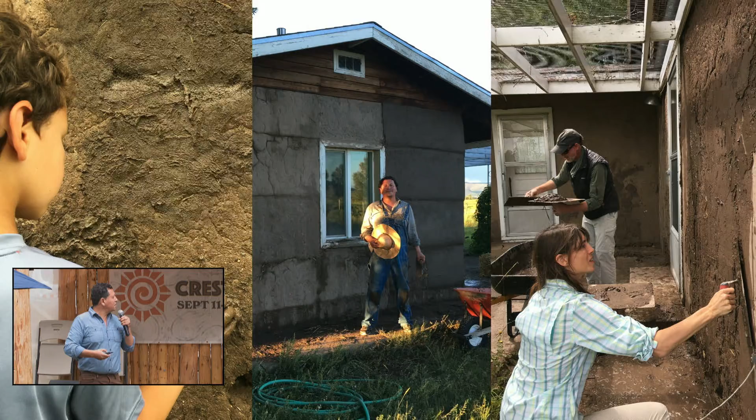My own great-grandmother's sister's family's house, which I use as a test site for teaching traditional and indigenous building technologies, how to earth and plaster in traditional ways, how to make adobes, how to make hornos. I tap into traditional cooking traditions as well that were practiced by my family. But there is an ethos around thinking about what is in the landscape and how can we build with that material.

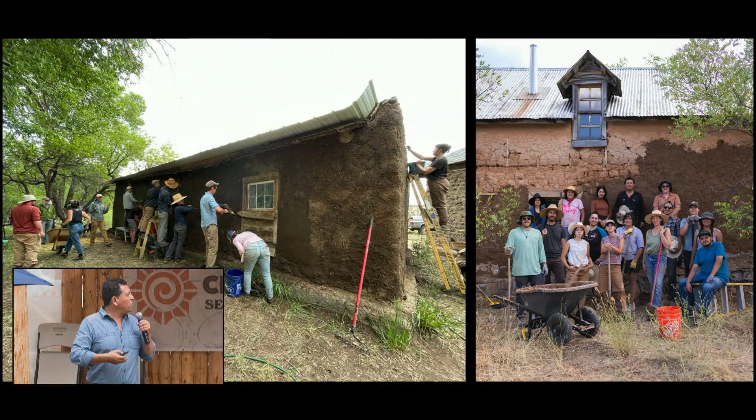So I host workshops often that connect people of earth and heritage practices back to these practices that have been disconnected from their traditions because of capitalism, because their lifestyles are changing, because of assimilation. And so earthen architecture practices aren't continued anymore because of changes in code regulations and building regulations. So I teach these classes on how we can reconnect ourselves through the maintenance and restoration of these buildings.

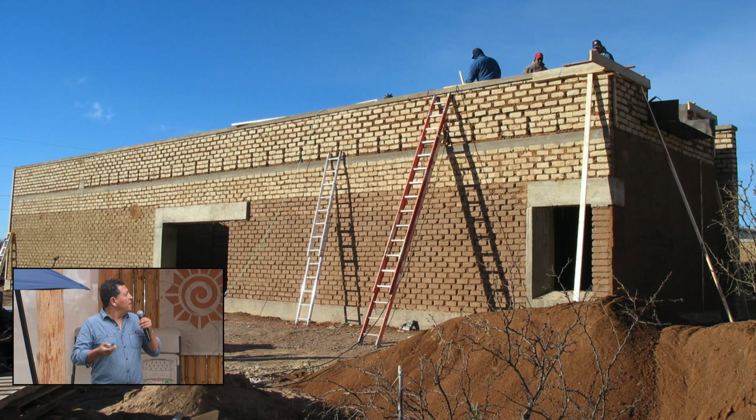Also, as an architect, I design buildings made of adobe, contemporary buildings. This is probably the first adobe building built in Marfa, Texas in 100 years, called the Box House, entirely made of adobe, plastered with adobe on the inside and on the outside. The bricks on the bottom come from New Mexico. The bricks on the top come from Ojinaga, Mexico. So there's a future archaeological project or anthropological project or geological project built into this house that connects this house to borderland landscapes.

I also think about how there's a politic embedded in building with earth. Not only the politics of working with codes, but also the politics of being activists that want to hold true to these traditions of building, and how adobe buildings can be a political project.

This was a project I collaborated on with two artists from Europe called Prada Marfa. It's not an actual Prada store. It's a sculpture. It's an installation built in the Chihuahuan Desert in the middle of nowhere, but it holds the 2004 line of Prada shoes and purses. So there's a paradox in this building.

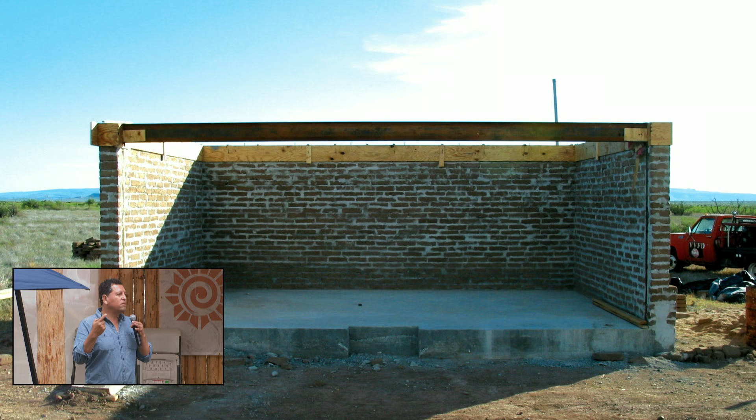There's a paradox about this building being in the borderlands, about a site where people walk hundreds of miles to come to the United States, a site where these shoes that cost in excess of $1,000 are on display, and it talks about the borders between wealth and poverty in the United States, particularly in the borderlands of Texas and Mexico, and the contemporary borderlands. A building we made out of adobe to demonstrate again that juxtaposition between wealth and poverty, between contemporaneity and history and tradition.

We set each adobe brick in a cementitious mortar, not because that's a better way to build, but because that's what the US military used to build forts after the Mexican-American War along the Texas-Mexico border. And you can see those buildings in Marfa, Texas, and how time has taken a toll, in fact eroding the adobe faster because it's set in an impermeable layer of cement.

In fact, this wall just collapsed recently, I was told, after being there for maybe, I don't know how many decades or close to 100 years. But these are expressive ideas about how we can communicate politics, tradition, culture within a very single, humble material.

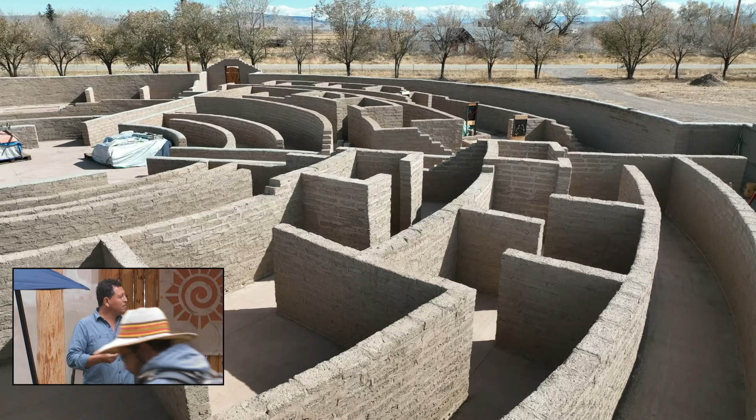If you've been to the town of Conejos in Conejos County, I've been working with the community there for 19 years to design and construct this labyrinth as a site of internal reflection, of prayer, of spiritual contemplation. And it finally was completed this year after 20 years. The community made over 40,000 adobes to build this structure. We taught the community how to make adobes, for those who didn't know, how to stack them, how to lay them. And after 20 years of slow process, this came together.

Obviously, I have an obsession with earth and architecture. I try to share this with the world. I have a website called eartharchitecture.org. You can go to that website, and it's kind of a repository of earth buildings from all over the world.

Because earthen construction is actually what connects us across the planet. People build in New Mexico in the same way they build in Mali, Africa, in the same way they build in Yemen, in the Middle East. On every single continent, you can find similar construction processes and methodologies.

In 2008, I also wrote a book called Earth Architecture, which talked about earth being a modern building material, a building material that can connect us to, at that time, our 21st century lifestyles. And at the very end of the book, I wanted to talk about what the potential future of earthen construction was. I talked about how the internet was connecting us and shaping the way we can inform each other about earthen construction practices. But there was a novel technology that was emerging called 3D printing.

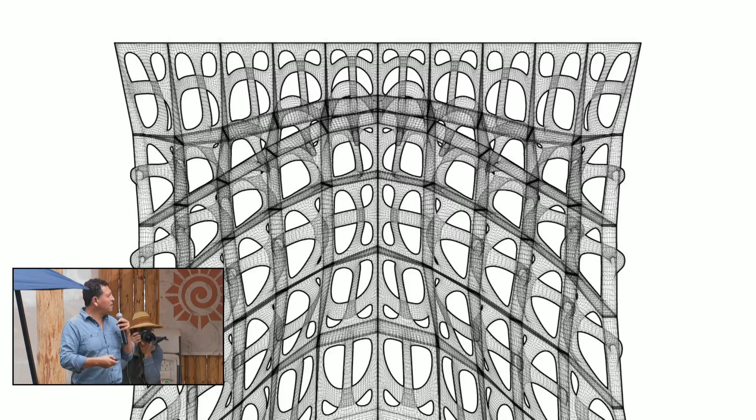This began in 2009. It's been a slow process, but I'm trying to figure out how we can take humankind's oldest additive manufacturing technology, which is earth, and create structures using computational design, digital design. And we had lots of successes in using clay and being able to use additive manufacturing to make objects like this. They were very fine and detailed, and because they were so fragile, we began to fire them and make ceramic objects.

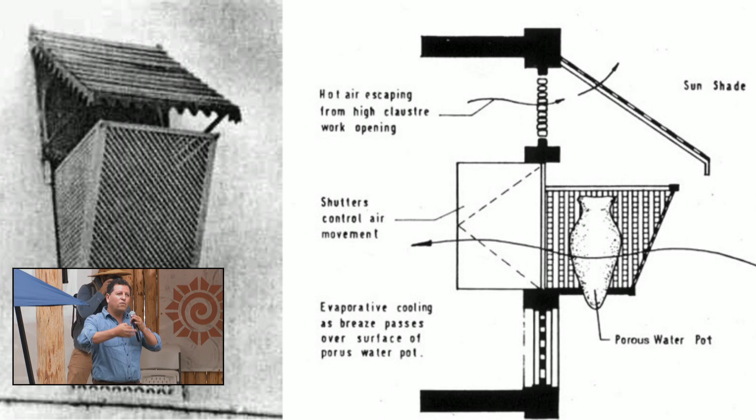And I wondered, well, if a robot can make ceramics, what do we do? Do we make bricks? Do the bricks hold plants? Do we make bricks that have air pockets that can hold insulation? Can we build upon traditional ancestral intelligence to think about how we can transform simple things like some of the earliest swamp coolers, which were made out of very porous ceramics, that were often placed in a window where cool breezes came over that humidified the air, lowered the temperature in a building? And could we make bricks that could do the same thing, that could hold water, that can pass air through, humidify the air?

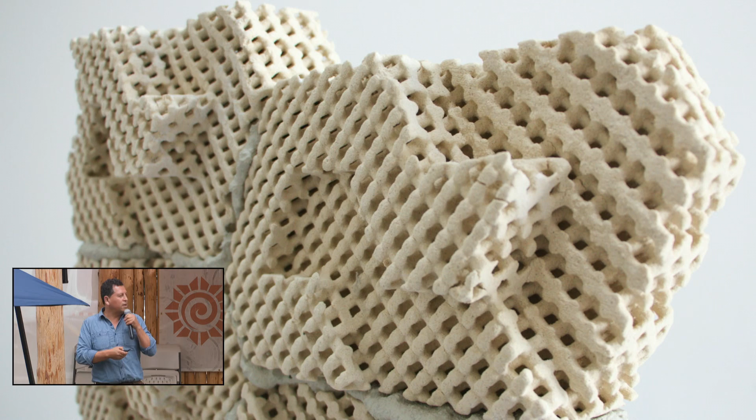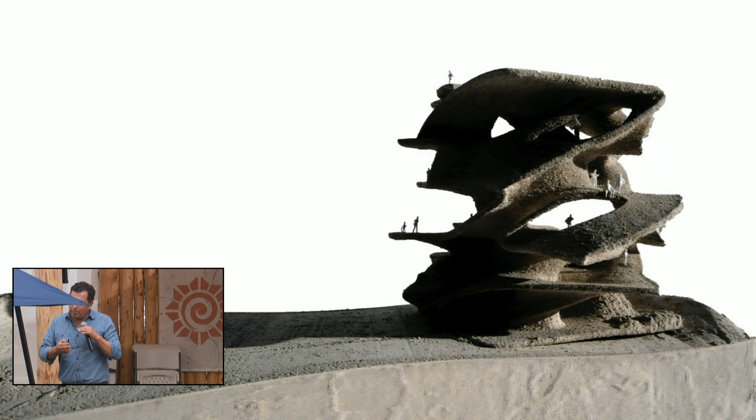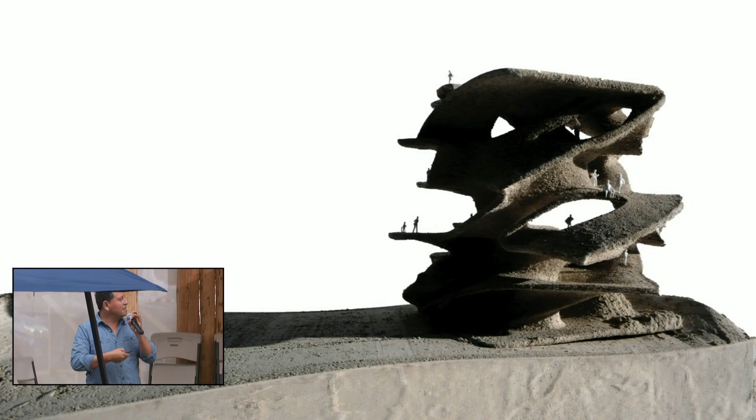So started to use clay, started to experiment with sand, began to think about how we could make objects made out of sand. And this is at a time when 3D printing was in its infancy, and it was very expensive to print a very small object with a 3D printer. A small object as big as this microphone might have cost $80 to make at that time. But because we developed this material using sand, it became very inexpensive. And I began to imagine, well, what could buildings look like if they were made out of this material?

But also, I was making models. Then I realized, oh, I can make assemblies. I can make assemblies of parts that could begin to make walls. And so these are some of the earliest studies made out of sand, thinking about how we can create an aggregation of objects based on the dimensions of the 3D printer that we had, and make much larger objects that attenuated sound, that responded to structures, and also always looked back to the ancestral intelligence that were embedded in our knowledge base of construction.

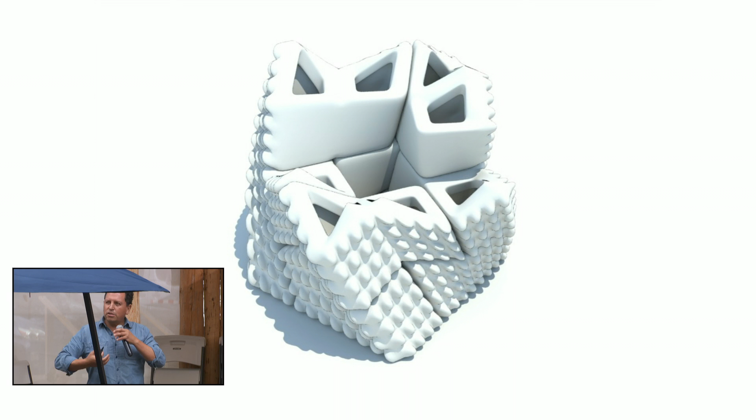And so if you're familiar with Incan ashlar masonry, you find this in Cusco in Peru, these interlocking stone blocks that are very difficult to achieve. It demands incredible craftsmanship to make blocks like this. This one, I think, has 12 corners of interlocking these blocks very tightly. But we could maybe 3D print earthen blocks. Those blocks in Cusco actually respond to earthquakes. They're very seismically resistant to earthquake forces. Could you create blocks that do the same thing with a 3D printer, that allow them to be interlocked, that have instructions embedded in them, that have handles on them, so you could quickly build a structure that's seismically resistant using the building material right beneath our feet?

This journey of thinking about local materials and this ethos about adobe allowed my studio to expand the possibilities for what else might be considered a local material. And we began by just looking around the kitchen, the things we throw away, like coffee grounds. And we began to invent a material for 3D printing that used coffee. If you're familiar with 3D printing, there's a lot of plastic 3D printing materials available that put a little bit of coffee or a little bit of wood or a little bit of some material so it kind of looks like this.

We made a teapot that was based on the first pot ever. The first object that was ever translated from a physical object to a digital object was this teapot called the Newell teapot, or the Utah teapot, because it was developed at the University of Utah.

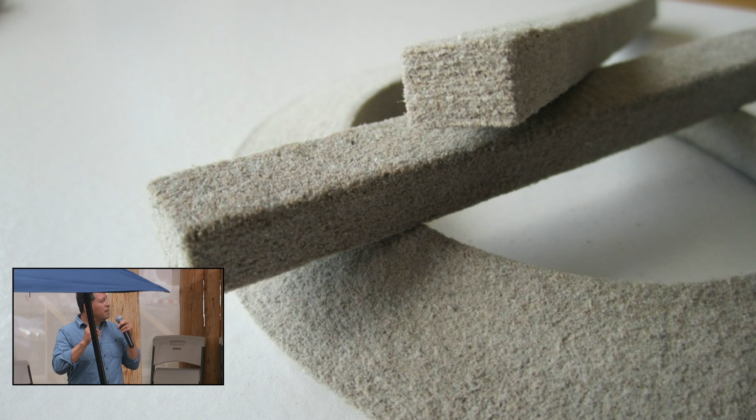But we experimented to see if we could make a material for 3D printing out of this waste product. And so these are Chardonnay grape skin objects and cups that we made out of that. Not only other biological-based materials, paper made from paper pulp and paper waste, newspaper waste in this case. These experiments made of paper pulp evolved

to the point where we could begin to print with sawdust. And in the US, we produce like 7 million tons of sawdust a year from the construction industry, and it usually goes into landfill. So this became a very productive way to think about how we could use this sawdust, not in a subtractive way.

And what I mean by subtractive is that we have a forest, we cut down trees, we take those trees, we subtract them, we make boards that are used for construction when we chop them up. And ultimately, we're left with a lot of sawdust. Could we use this additively to imagine the way we can make new products in the future?

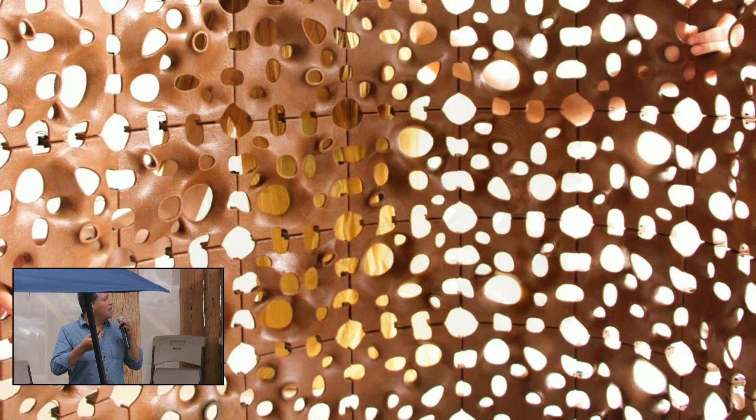And so we developed a 3D printing material made out of sawdust, always imagining how we could maybe make building facades, components in automobiles, screens, any kind of object just made out of 3D printed wood. And it became very, very successful. We actually started this company and sold this company. We called it Forust. We believe that the forests are for us, so we should save them.

And unfortunately, when you sell a technology, you think that all of a sudden that technology is going to take over. And I was very excited and said, now I can print anything. I'll print a house. That was our first project after we sold this company. And instead, this company decided to shut it down. Just like they bought it, and they don't want to do anything with it.

Sometimes companies do that. They don't want something to go to market, or they don't want to go to market yet. So that was a lesson in thinking about what it means to develop intellectual property and attempt to bring it into market, and the kind of trust you might have in companies in order to think about the future of construction. Other materials, salt.

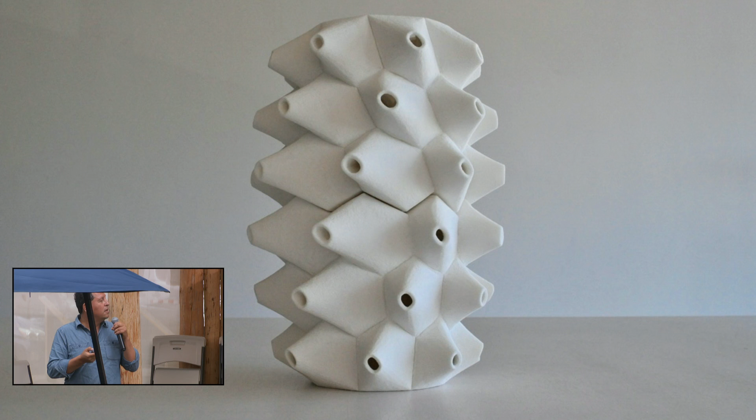In Northern California, if you ever fly into San Francisco Bay Area, you see these beautiful colored ponds. They're actually microorganisms that are responding to the brackish water, where they fill up these pools, and over the course of a year they dry and they produce hundreds of thousands of tons of salt. So it's a material produced by wind and sun, and we developed a 3D printed material made of almost pure salt.

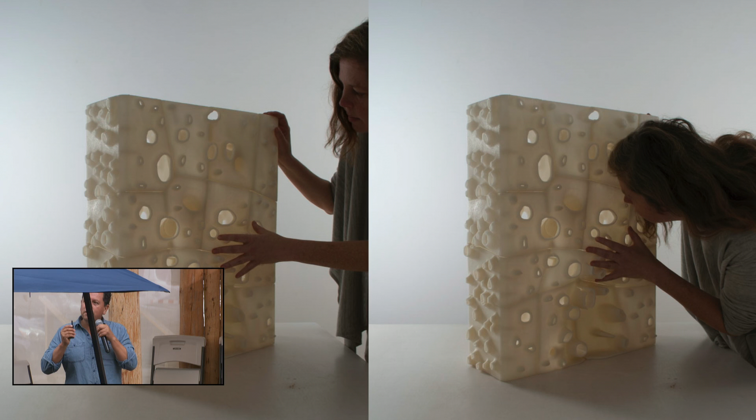And all these materials, when they come out of the machine, they're actually edible, except for the wood. Yeah, I guess you could eat the wood if you wanted to, but they're totally non-toxic. In some cases, we would coat them with a sealant made out of bamboo that was developed at the University of California. So it's like a low VOC polymer. Every single wood product in your home is coated with a polymer, but they produce a lot of gases. This one, in fact, came from a recycled bamboo product.

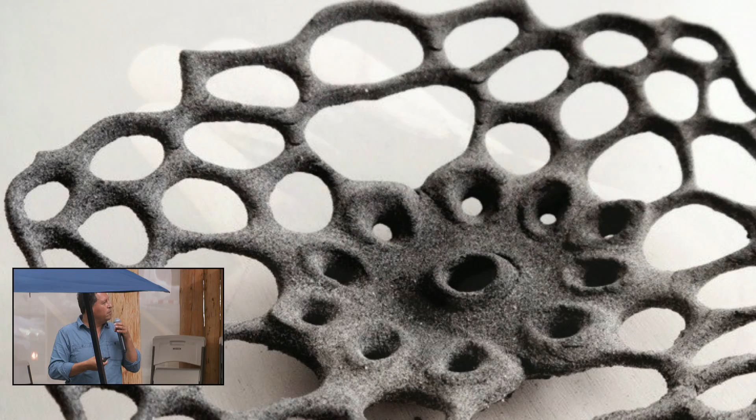But because some people ask me, are these waterproof? In many of these cases, they actually are, and these epoxies actually strengthen them. So this is an experiment of salt. So we're beginning to think about how we can scale up other materials, car tires, cryogenically frozen car tires that are pulverized, developed into a 3D printable material. And these are some of our experiments that came out of our studio.

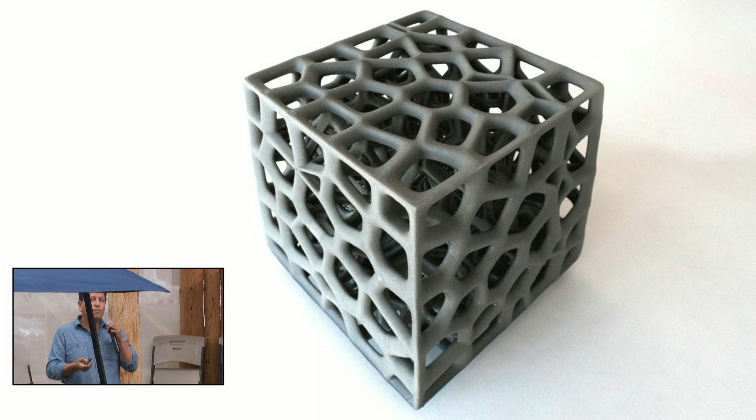And of course, cement. And that's where the 3D printing industry has gone. But we developed a way to produce objects with cement that used very, very little water and no formwork whatsoever. It can make very complex objects, very thin objects. The cement was even translucent if we could print it that thin, about 1/16 of an inch thin, and extremely lightweight.

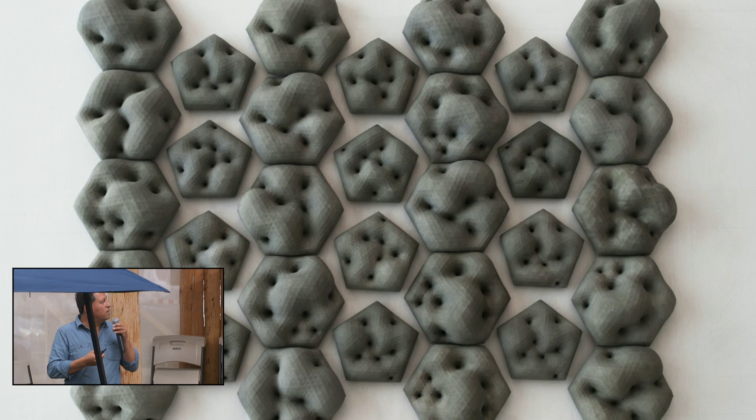And so lightweight that they become, you couldn't pick up a concrete ball this large, but these were very lightweight objects that could be assembled very quickly. And so these aggregations allowed us to assemble furniture, partitions, spaces, objects.

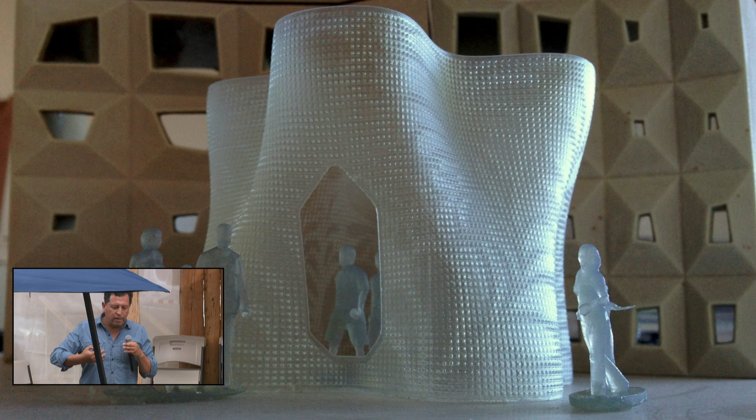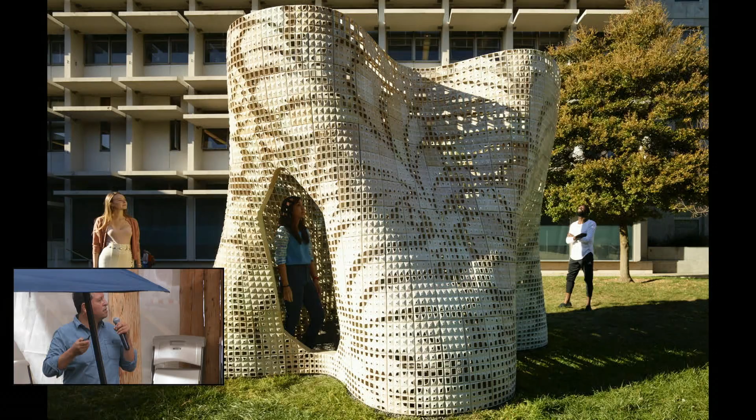And one of the beautiful things about this way of working is that if you are a designer or an architect, you typically create a set of instructions for someone to craft or build the thing that you want to build, whether it's a building or a piece of furniture. But the beauty of this is that you can design this in the computer and go straight to manufacturing, straight to construction. So the very same information used to create this model was the very same information used to create this space, this object. And extremely complex.

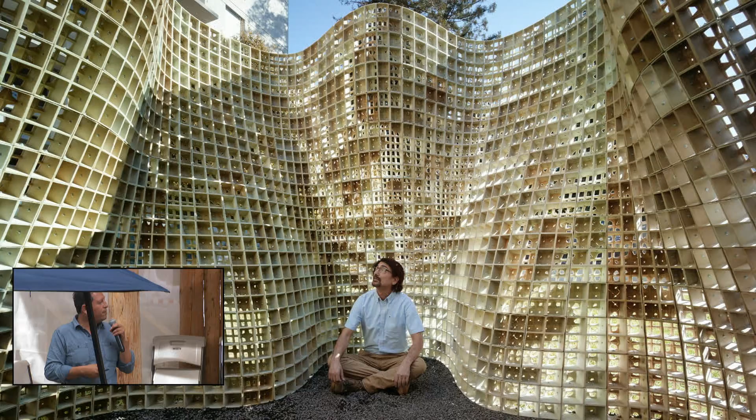Every single one of these is an experiment in a way of working and exploring the possibilities of additive manufacturing. In this particular instance, these experiments very much had to do with the notion that you could disassemble and assemble an object quite quickly, and just a few people could assemble this room in just a matter of 15 minutes or so.

So it was an incredible diversion that lasted many years, that we began with earth and ended up with salt, wood, rubber, car tires, all these things. But the idea was that we would always return to a way of thinking about how we could scale up the possibility of printing with earth. One of the requisites of this was to have a higher degree of control of the movement of a robot to deposit earth in a particular way.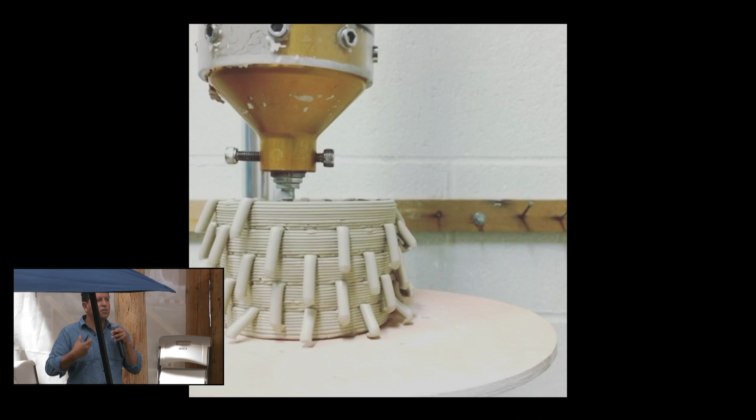And about 8 years ago, we started on a project that began to 3D print with ceramic clay, and we started to create these very weird objects. And this was a very different journey that we embarked upon, because we are not ceramic artists, but we had invented a way of placing clay down that didn't follow the rules of 3D printing. The rules of 3D printing is that you're making an object in the computer, and the idea of that with a robot was to make the exact object that was in the computer.

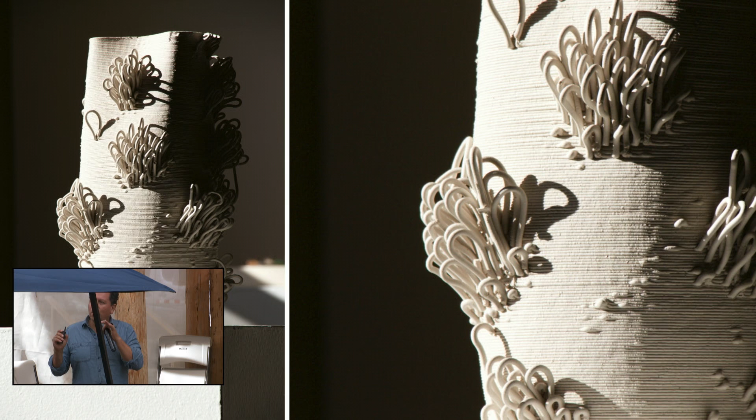But instead, we found that the glitches were the most exciting part, that you could deviate from the making of the object to make objects that had incredible textures, new kinds of possibilities that responded to the gravity and plasticity of the material. The same way that you would do with your hands when you're building a building made of adobe. You might experiment, you might push, you might leave your handprints in it. In a way, this is leaving a digital handprint based on errors that we calculate into the making of these objects. Not knowing what these are good for, just that they're really beautiful and interesting in a very scientific way or in a very artful way.

And we explored ways of making ceramic objects with incredible textures, different kinds of forms or shapes. And you might think these are all vases, but they're not vases. What these are all are studies in the movement of a robot depositing clay. They're mathematical formulas that become material. And we began to think about, okay, well, how can these become building materials, and what are they good for? Could they become facades? Could they become new kinds of cladding systems, micro shading devices, shingle devices?

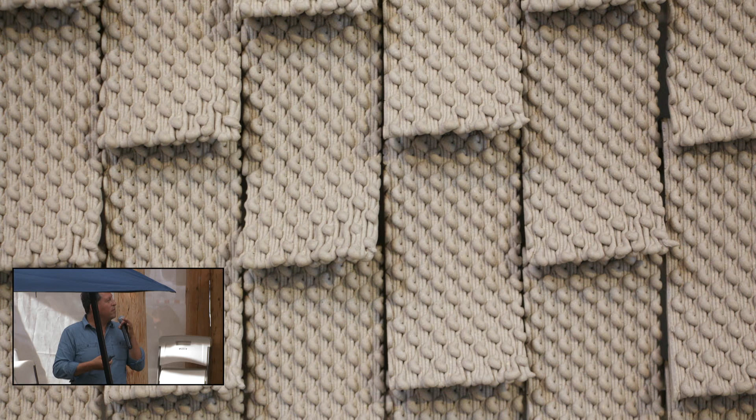The politics of printing with clay also entered into this. I don't remember when this was, like 6 years ago, we were invited to explore this idea at the University of Texas at El Paso's Rubin Center. And we asked if we could invite 25 ceramic artists from El Paso and Juarez to participate in using robotics to make ceramics. And we worked with the geology department at UTEP, and we went around looking for traditional clay sites, and we found this incredible spectrum of clays that we used that were found both in Juarez and in Texas. So they're this binational borderland ceramics, and the potters produced over 250 ceramic objects using local clays, found both in Juarez and El Paso.

We pushed this idea further, of this idea that an object, sort of like Prada Marfa, has a politic embedded in it because the soil has a politics embedded in it. Whether the soil is contaminated by something that happened, whether the soil lies in Mexico or the United States, or it's blended together to become a fusion. And so we created a series of objects based on something that our president said when I was in El Paso. He said there's a lot of bad hombres at the border. And I was there in El Paso at the time, and I said, well, that's really interesting, a bad hombre.

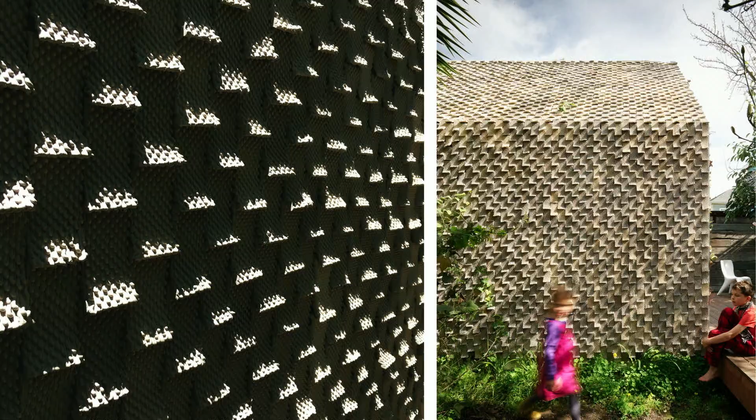But we used this as an opportunity to test at a very small scale many of these technologies in the development of a project we called the Cabin of 3D Printed Curiosities. We created a 3D printed shingled skin out of about 3,000 3D printed ceramics to make the waterproof cladding for the building that was hung on a 3D printed structure.

Each of the shingles is actually digitally exactly the same. They're clones of each other, but we developed a system so that when they were manufactured, they'd wiggle a little bit so each one became unique. And we used recycled clay for the entire structure.

On the front facade of the building, we used the grape skins, the salt, the cement, the sawdust to explore a different kind of tiling method using these recycled materials from the San Francisco Bay, holding plants that thrive in the San Francisco Bay Area, these succulents that use very little water. These photos are from a long time ago, but the building is still in great shape. In fact, we have to prune these plants because they are really successful.

So this is the Cabin of 3D Printed Curiosities. Furniture is 3D printed. The interiors are 3D printed. Objects are 3D printed. We benefit from the translucency where the entire cabin becomes a lantern in itself that sets a mood, sets a kind of phenomena for the interior of the building.

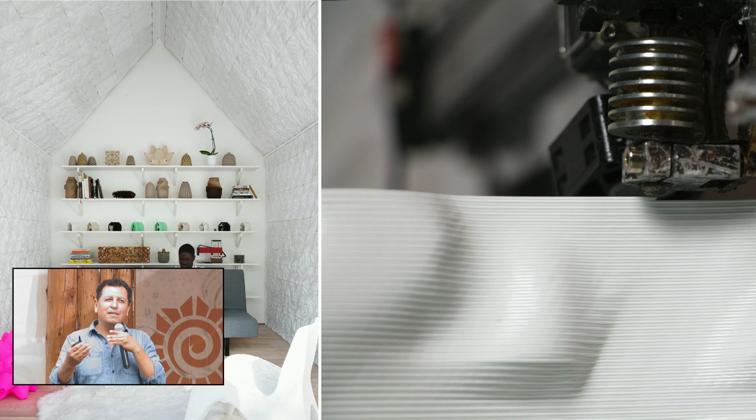You can see 3D printed coffee, a pot made out of coffee, the wine goblets, the furniture, this cladding system that is very much like a pressed tin ceiling, but where every surface is actually unique instead of similar, because it's not mass manufactured. This is at night. This is the transformation of that small little cabin into a place to sleep. And that's the Cabin of 3D Printed Curiosities.

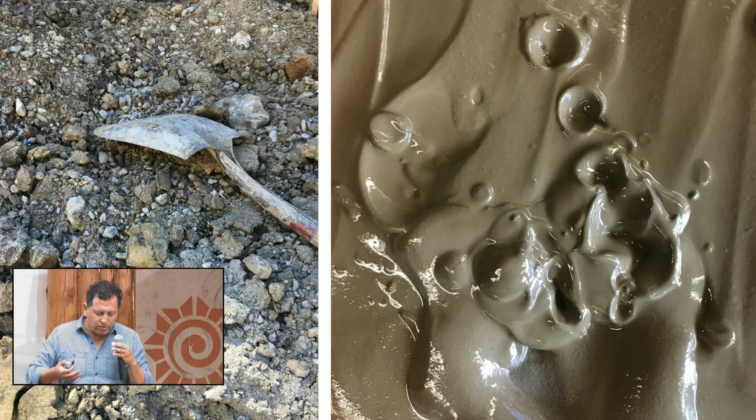And now, I'm always wondering, when do we make the switch to move to the 3D printing of the Earth in a more robust way? And that has been the goal forever. And it's only been in the last 4 years where we began to make the reality of taking the soil underneath our feet and printing it at a much larger scale.

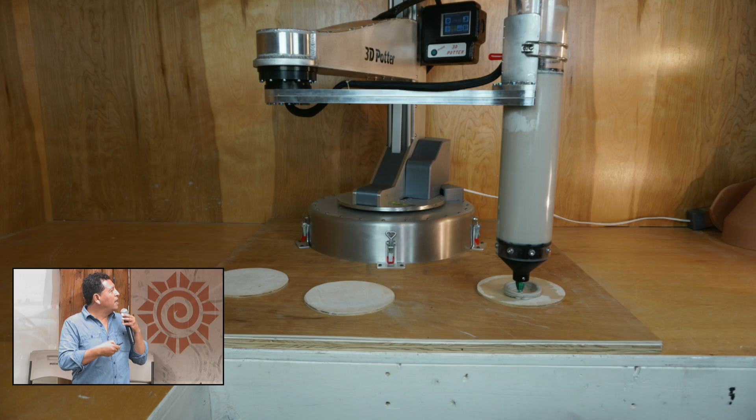At that time, 7 years ago, this was kind of the dream, that all those objects were actually aspirational scaled objects, models, to think, can we do this using the soil underneath our feet, using these 10,000-year-old traditions of adobe. The first thing we had to do was invent a machine. I sent this schematic design to a company to see if they could make a robot that moved this way that would be very inexpensive, and we collaborated over the course of a year, and we produced this robot, which is now sold everywhere. They've commercialized it.

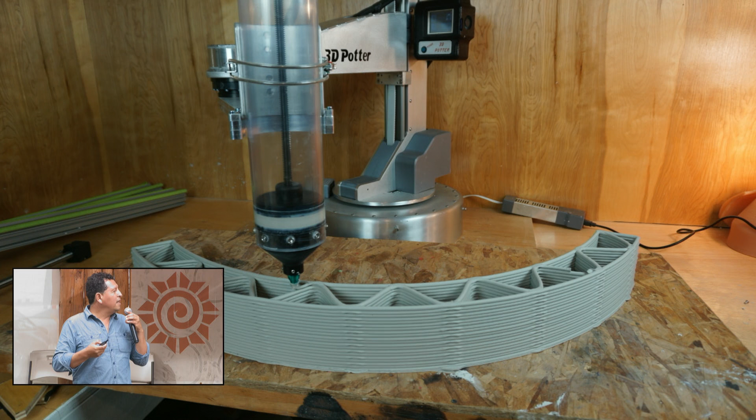The beauty of it is it could make many ceramic objects at once, or it could make one big object. It has robotic parts that you find in some of the most expensive robots, but this machine only cost about $14,000 to make, which may or may not seem expensive, but a typical robot costs about $80,000, and you can't do anything with it yet. You have to then program it. You have to get all the parts. This became ready to go.

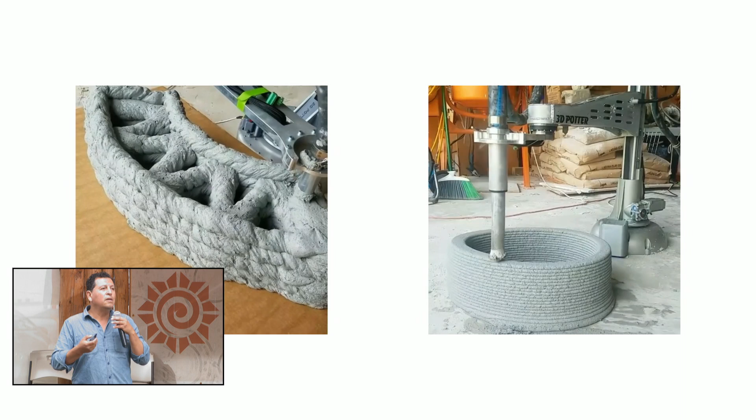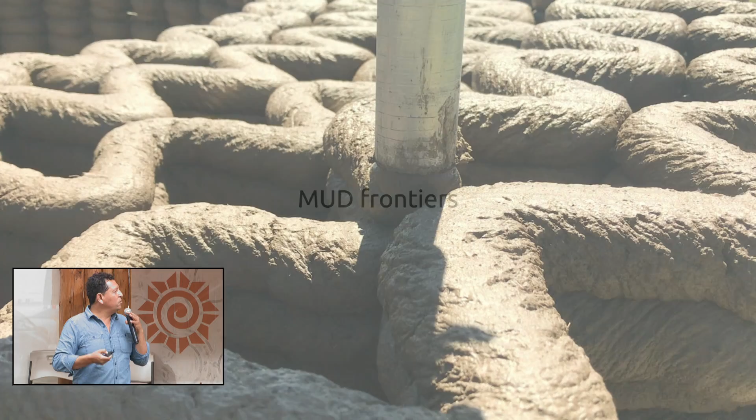We also had to figure out how to push large amounts of soil through a hose, and that took many, many months to do. This is a manual 3D printer making these objects, but we're exploring ways to move soil through a hose controlled by this robot. And eventually, we developed a formulation, precision, and once we did that, we brought it back to the historic borderlands in Conejos County to, for the first time, build with mud in a radically new way, using robots.

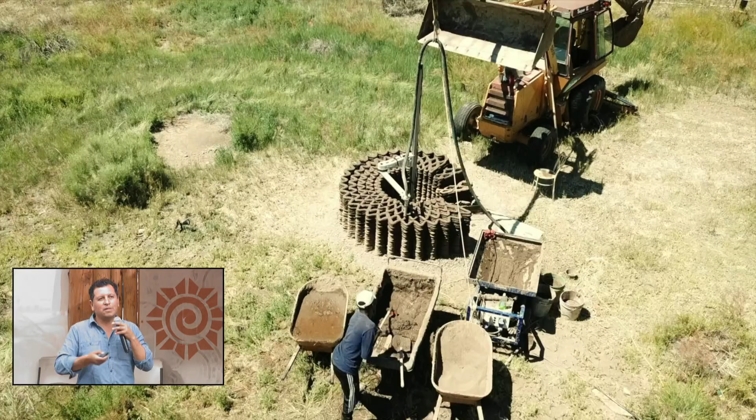And it became an ongoing experiment that we called Mud Frontiers, because we're doing it in the historic frontiers of the United States and Mexico. And we're also exploring a new frontier of building technology that I hope can reintroduce us to our ancestral ways of building, since we've been disconnected from those ways of building, right?

We don't get up every morning now and go out and build our crops, mend our house, add an addition to our house, all connected to land-based practices. We get up sometimes, I don't know if you do, but we get up and we go to work somewhere. I imagine you all do, but this is probably a place where you have a greater connection to the land than most of the places that I lecture at.

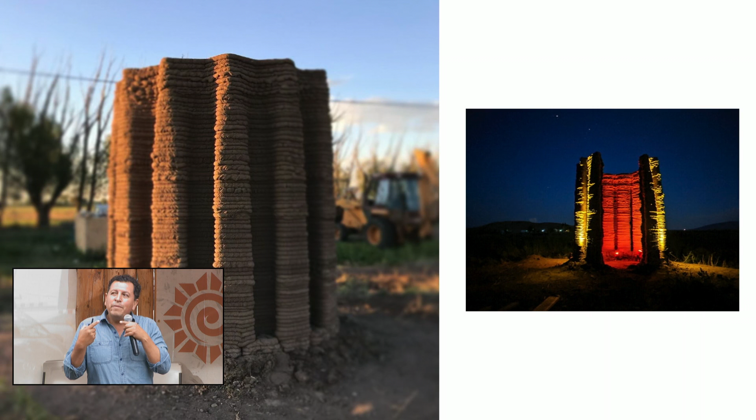But there's a heritage disconnection that has happened, an amputation that disconnects us from our ancestral practices of building with earth. And so my aspirations and my hopes are that with this technology, while we might be still disconnected from the building of our buildings ourselves, we might be assisted by technologies that we can interact with.

In other words, in the same way we democratize the software in an interface so that anyone can 3D print with clay, my aspiration is we can democratize the software so that anyone can design their building and participate in the building using robotic technologies, reconnecting us to a practice of earth and construction.

Because for me, a building made of earth is not just a building material that we go to Home Depot and we buy a board. We don't know where this board comes from. We buy screws. We don't know where the screw gun comes from.

For me, building a building made of earth means that we are digging from ancestral lands. We are connected to it with our hands or our ancestors' hands. And we have a cultural and traditional heritage relationship to that material. It is like a relative to us. And so I'm advocating for something different than contemporary construction practices.

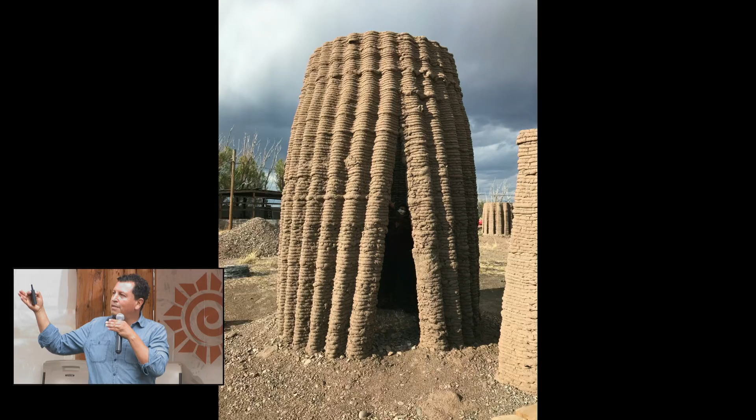If you think about a typical building, walk up to any of these buildings, cut a section through it, you'll find that there is an exterior siding. There's probably a vapor barrier. There's probably a plywood sheathing. That plywood sheathing has glues in it. There's something that screws all that together. There's maybe a paint on that surface.

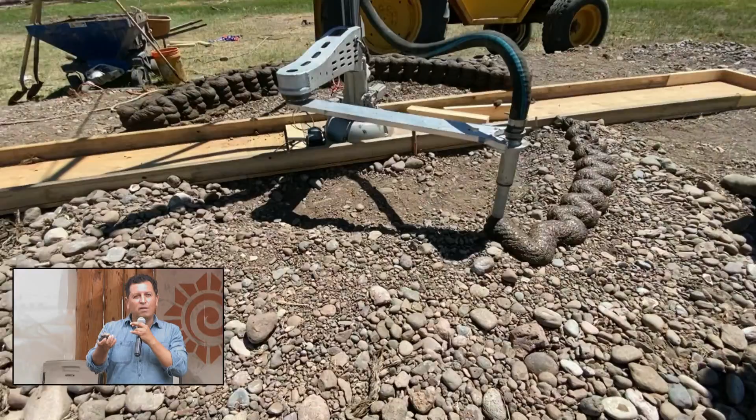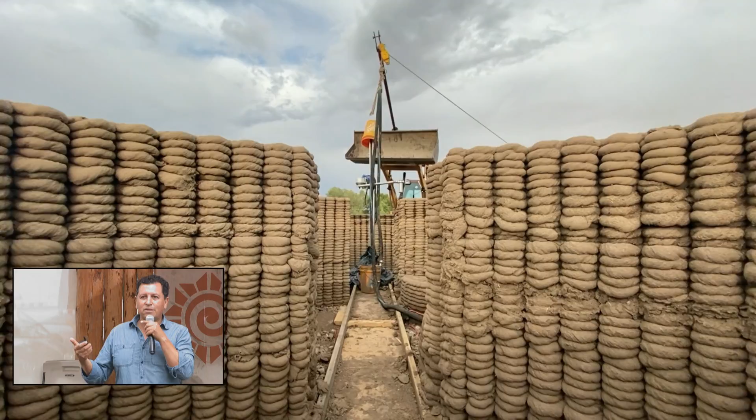There's an insulation. There's studs. There's wiring. There's conduit. There's plastic that wraps those wires. Keep going. There's sheetrock. There's the paper on the sheetrock. There is paint. There's all the associated tools that are very particular to each one of those materials. And there's all the expertise that is connected to the use of each of those materials. So you hire a painter, you hire a sheetrock guy, you hire a woodworker.

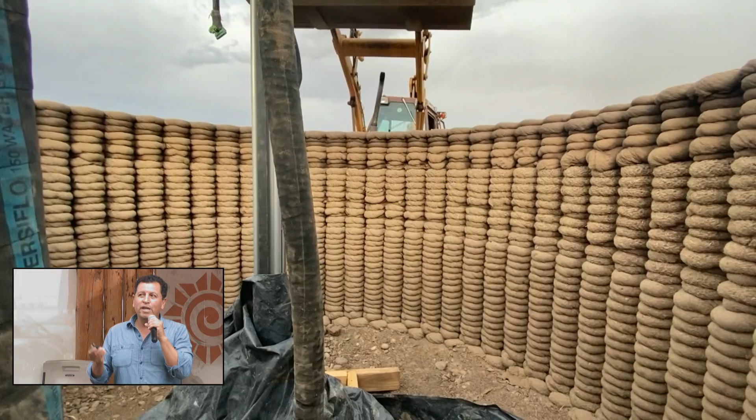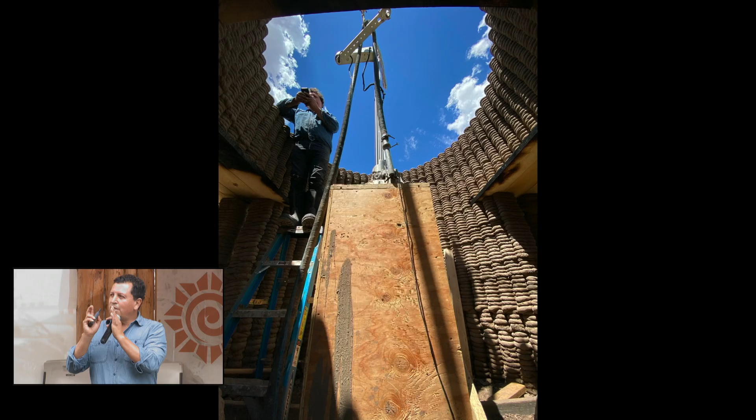There might be 30 different companies in materials alone that are represented within 8 inches of wall. Not to mention the tools that are used. And so the wall in contemporary construction is actually a real estate grab for thinness. All the companies want to find some way to insert their product in the thinness of a wall so they can profit from that.

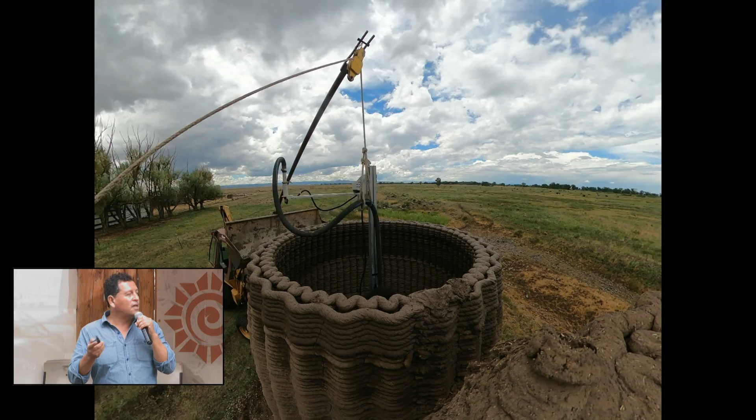So when you build a building, you're building with multiple materials, with multiple expertise that come from who knows where. But what if we can move towards building again with one material that does the job of all those materials? So that's my aspiration. And these are experiments that I've been working on over the last 4 or 5 years, thinking about how we can take the soil from the site, using a robot, and create structures.

One of the first opportunities I had to do this outside of the lab, outside of the studio, was during COVID. I moved back here, I brought the robots, and I wanted to embark on a project that I called Casa Covida. Covida isn't really a word. It sounds like COVID. I built it during the time of COVID. Casa means house. Covida also sounds like cohabitation. This is a house for cohabitation during the time of COVID.

It's an experiment in a multi-chambered room made entirely out of mud. 3 chambers have spaces for sleeping, spaces for cooking and warmth, the hearth, and a space for bathing and for reflecting on this relationship between earth and sky.

All my architect friends tell me, well, this doesn't have a roof on it. I said, the sky is the roof. And they said, well, what kind of roof would go on a 3D printed structure? And I thought about this for a long time, and I thought an inflatable roof would be the most appropriate roof. So this big translucent pink roof structure that could be inflated when it rains imparts this beautiful pink light into the interior, and was like a cherry on top of this chocolate sundae.

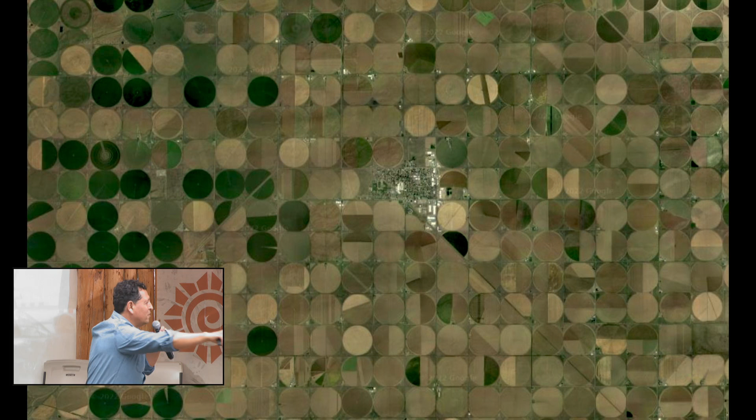The site, as you know, looks like this. There are all these center pivot sprinklers, and I thought it's so beautiful that the printer actually works like a center pivot sprinkler. It goes round and round. Doesn't mean that it can't print a straight line, but my goal is to print big and I have limitations. The biggest thing I can print is just to reach the arm as far as possible and to print. That's why things are round in my case, and in this case too.

And of course, you're familiar with all the silos that hold the grains that are grown in the San Luis Valley. And so I named this project Skylos because it doesn't hold grains, it holds the sky. And as explored earlier in Casa Covida, it's the space that allows for this reflection between an architecture of the earth, we see all the potato cellars in that part of the county made of adobe, and its relationship to the sky, which is so important to us, that brings us rain and sun and light. And it defines sky in many different ways.

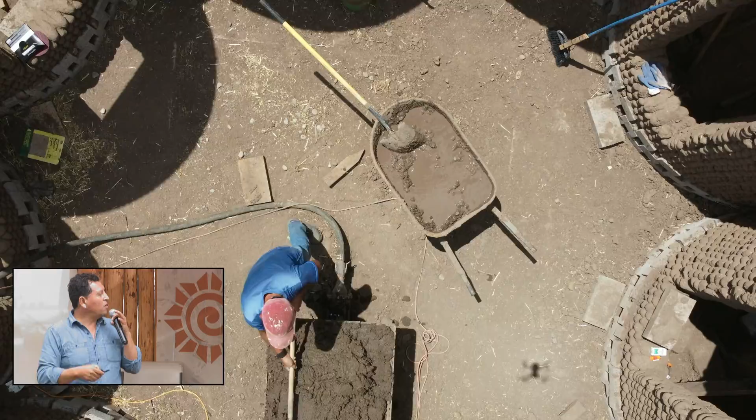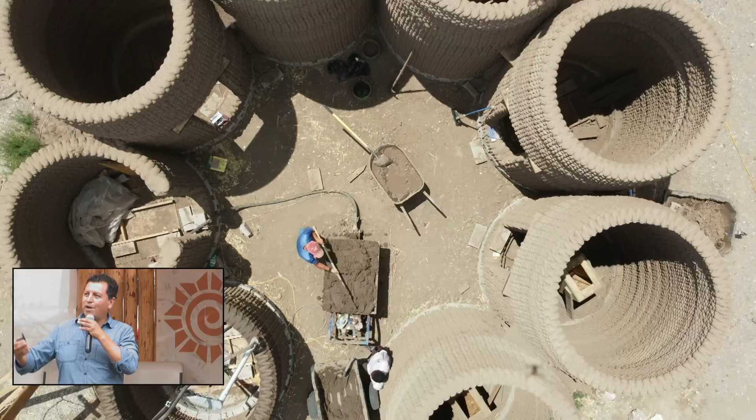And so there are 8 chambers, each of which are divided into 2 spaces. Originally, each of those spaces were intended to have a hot pool in them. So you would come to the Frontier Drive-In and you could soak. They didn't do that, but I wish they would have. Other things became more important. But this is the project under construction.

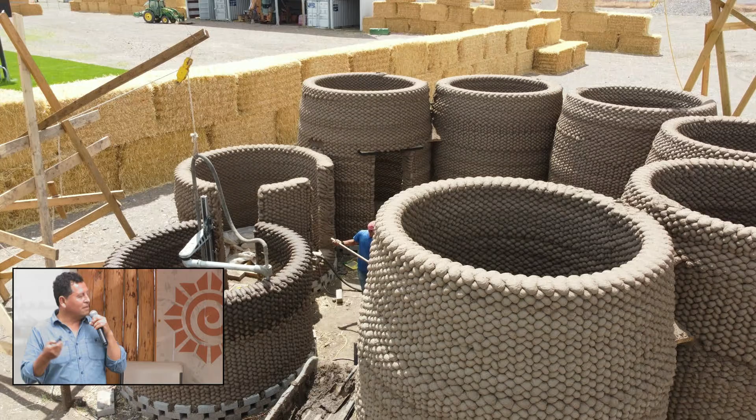And you can see that 3D printing a building is a little bit like a security job. There's nothing really happening unless something goes wrong. And so you see what looks like people just standing around. My very expensive graduate student there in the white shirt just looking, getting paid $30 an hour. But really beautiful and helpful. That particular individual there is now a professor at the University of Texas and has gone in his own directions with the knowledge that he learned from working on this project with me.

I'll just let you enjoy some of these views of Skylos from above. Okay, thank you.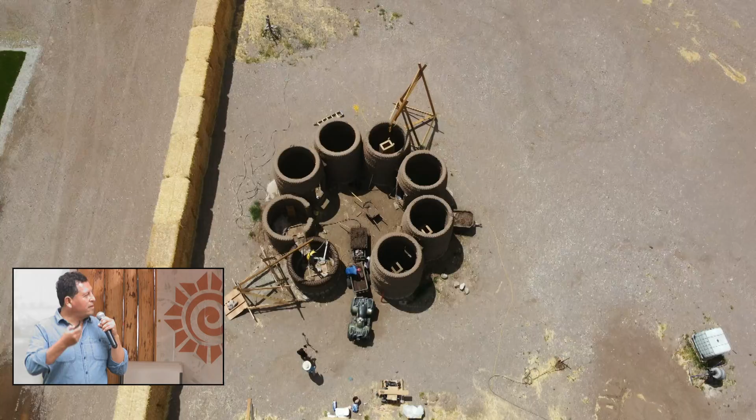And I think what's most important about this project is it's the first permitted 3D printed building in the world. We went through the building department, it was engineered, it went through all the regulations in order to be approved. So a big part of this goal and the work is not only our ability to do it, but our ability to do it through the legal processes of construction in the United States.

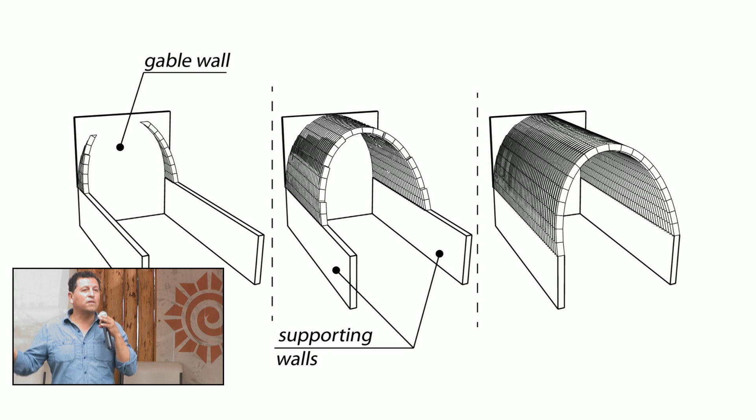I've been very fortunate that the success of this work has enabled me to scale up and to have a much more sophisticated robot that I was able to have manufactured over the last 3 years, which is still very portable, like the first one, which is not inexpensive by any means, but far less expensive than many of the 3D printing systems that you've seen that are bigger than the building that they build. But this recent experiment was an experiment to see if we can also build a roof out of mud.

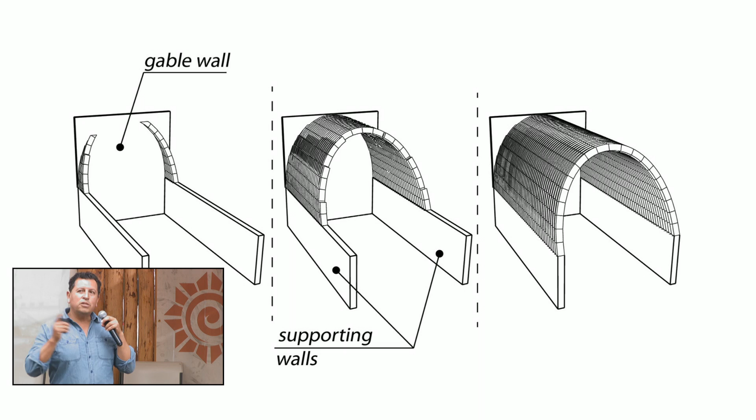There's a technology that's thousands of years old that comes from southern Egypt and northern Sudan, where builders can build a roof entirely made out of adobe using no formwork, called a Nubian vault. And if you can see that, basically there's a wall that's built, and then the masons will stack adobes against it in the shape of a parabola, which is the shape your hand makes if you do that, which is the most efficient structural shape that brings gravity to the ground. They've been doing this for thousands of years.

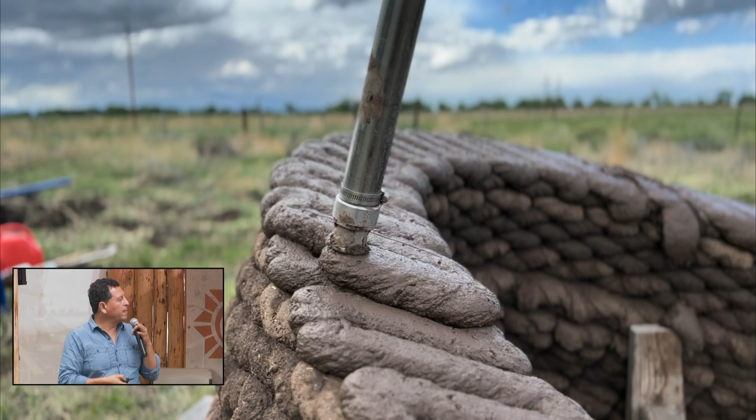And ultimately, you build it forward, and you make an enclosed structure. I wondered if a robot could do that. I wondered if we could take the same kind of algorithm that a Sudanese mason would use and translate that using wet adobe. And so this is the experiment to see if we can make the world's first on-site 3D printed roof. Not only the first 3D printed roof, but made out of mud.

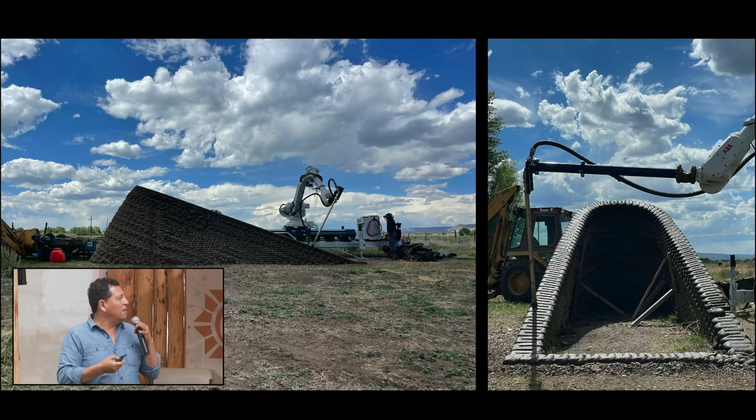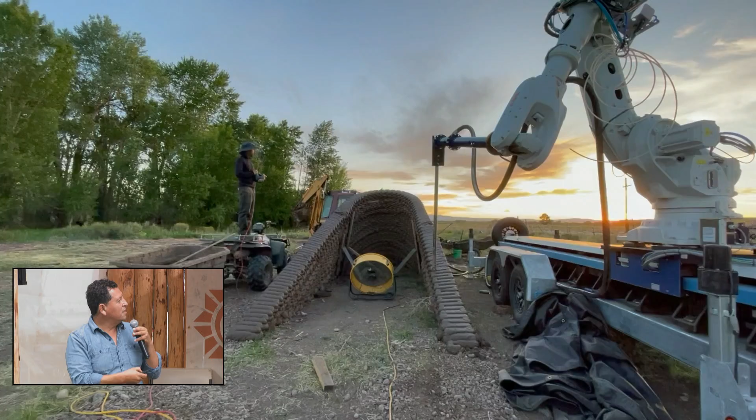And so you can see how it's printing at this angle using this robot that has 6 axes instead of the 3-axis robot that I had before. And slowly building forward. This pattern allows for a certain amount of friction so that the material can hold in place. And it prints until it encloses.

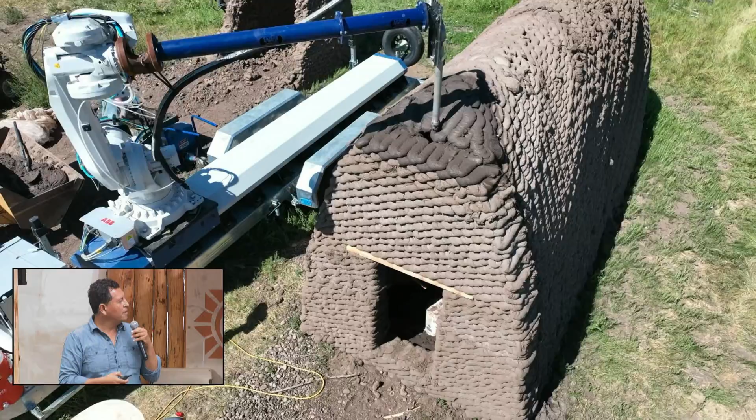And because mud isn't expensive, I don't mind that it spills a little bit, but you can see how it encloses off. And I'm flying the drone, I'm driving the robot, and my 14-year-old son is over there just making sure the hopper's full of mud. These textures prevent erosion from rain. It slows down rain. And there it is, entirely enclosed, the first 3D printed roof in the world.

A little small, humble structure, but I think an enormous leap for thinking about how we might build buildings entirely out of earth in the 21st century. So as I begin to think about how to scale up, I'm imagining what's next for this? How do we begin to print houses, architecture, buildings for people?

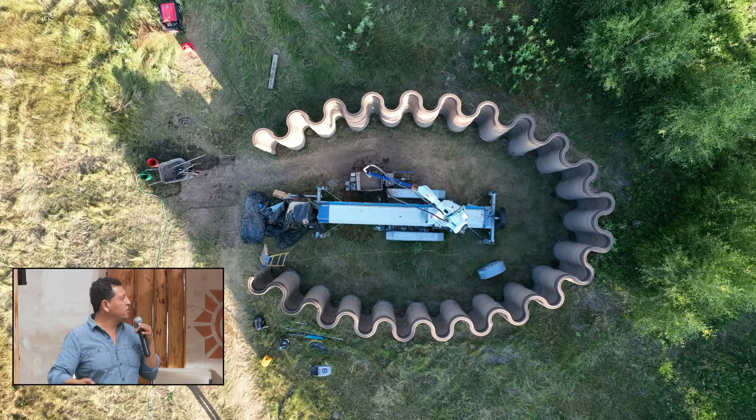And that I have not yet accomplished, but I'm beginning to do experiments that are operating at the scale that are very, very large. And using this robot, I simply wanted to see how big could I build a building just by one placement of the robot. And so Serpentine is that experiment. So that's just one experiment saying this is as big as this robot can make.

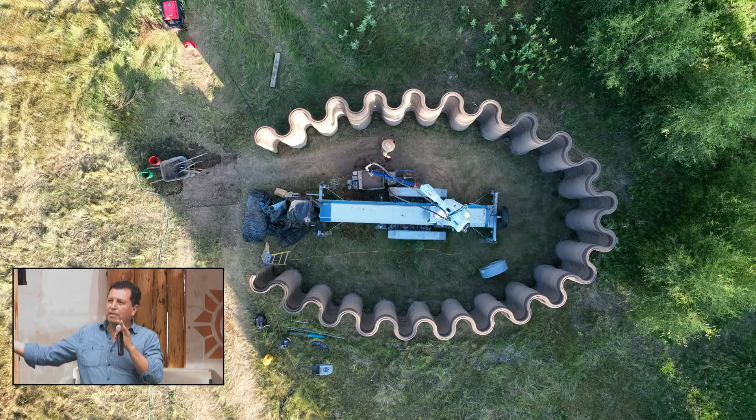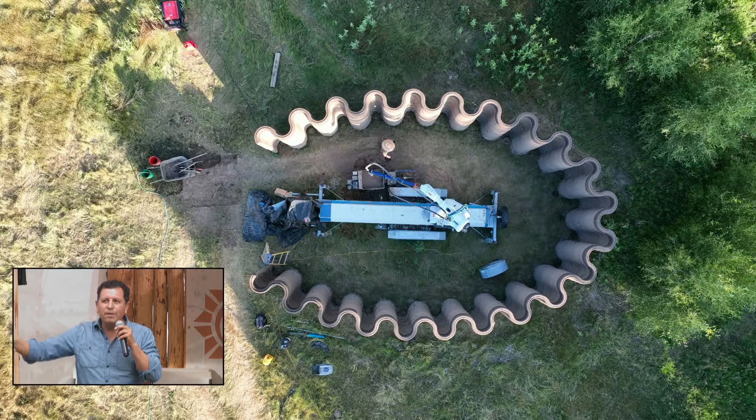But what's interesting about all of these experiments, and this one as well, is that we think of adobe as a massive building material. The walls of my own house are almost 2 feet thick. But because I can deposit the material in this serpentine way, using these same curves that we explored in those very first ceramic pieces 8 years ago, I can make 10-foot high walls that are only 3 inches thick using the material. And that's an enormous benefit to thinking about how we might construct in the future.

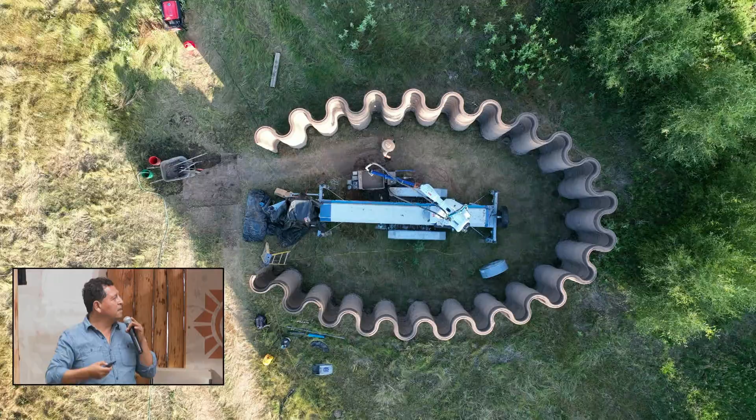And it takes on the idea of thinking about how we can work with the city, how we can work poetically, how we can work with a local source of material. And the material is really interesting because it comes from a mine within the county that provides all the soil for all the stadiums in the greater Los Angeles area. So it's an enormous material resource that came at a time when the very first layer of printing the structure was the day of the fires that burnt down LA.

And so it began a conversation about how we might rebuild LA using these material systems and these material processes. And so I've been in a lot of beautiful conversations about thinking about how to rebuild there. There are thousands of adobe buildings in the greater Los Angeles area already. The oldest buildings in California, just as in Colorado, just as in New Mexico, are all made of earth, the most celebrated buildings. And there's no reason why we can't reintroduce these building technologies and materials using a new way of building into our building culture.

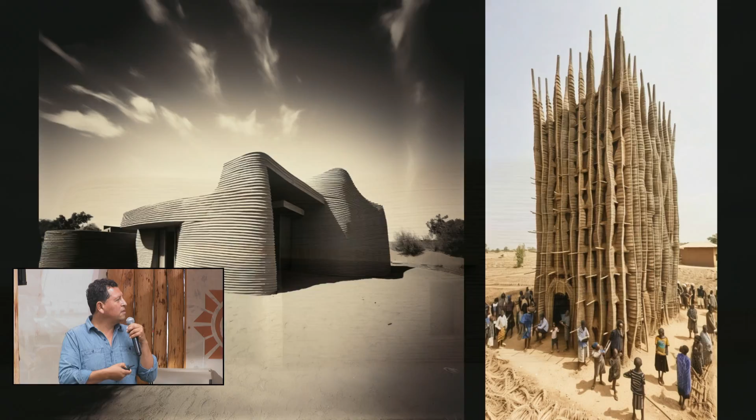So it's just an artistic experiment, a design experiment that I've been exploring for the last couple of years, thinking about how we can create new kinds of possibilities for an architecture of the 21st century that's entirely made out of earth, that uses robotic construction, that connects us to our traditional and ancestral heritage practices, that is thermally responsive, that is non-toxic, and maybe allows us to imagine a better future that allows us to be connected to the earth in ways that we've been exploring for the last 10,000 years.